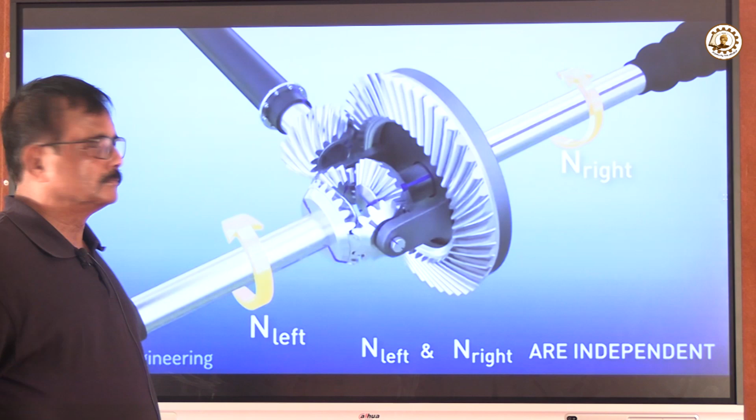Dear friends, now we have another part of our automobile engineering. This is very important, that is the differential. Why is the differential required? This is most important for an automobile, car or vehicle. Differential is most important. How it works and what are the functions of the differential, that

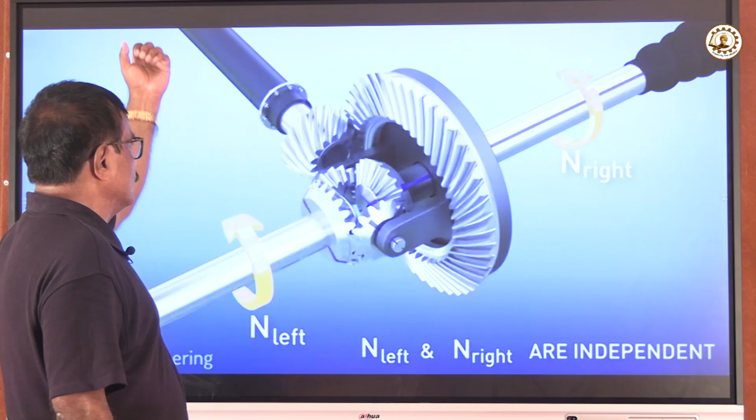we will learn today. Now you see, when a car is running, it has two rear wheels. The differential is mounted in the rear wheel. It can also be mounted in the front wheel if it is a front wheel drive. So in the front wheel drive there is a front differential with the drive shaft, and when it is the rear wheel drive, the differential is in the rear with a propeller shaft. This is the propeller shaft.

We were discussing the rear wheel drive. If it is not a rear wheel drive, then the differential will be in the front wheel of the car. So now we will talk about the differential of rear wheel drive. Now you see, when the car is running in a straight line, the velocity or RPM of the left wheel as well as the right wheel is the same. So no need to make any changes in the wheel rotation.

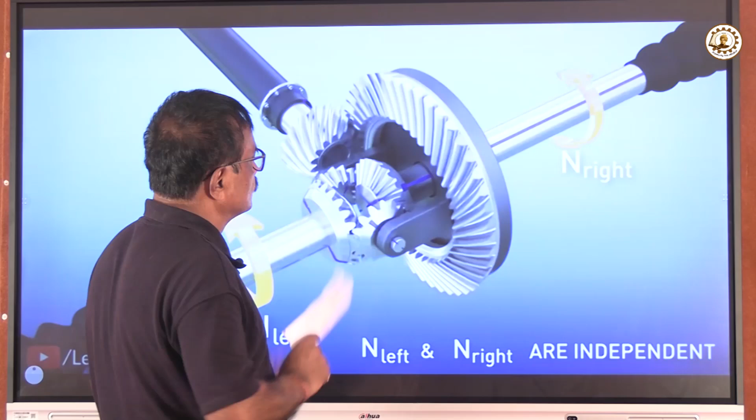But if the vehicle is taking a turn, suppose it is turning to the right, then what will happen? If it is turning to the right, they will form an arc, and the left forms an arc. If it is running in a straight line, there is no difference in the rotation of the left and right wheels. Now, if it is turning right, there is one arc on the right side and another arc on the left side. The right side arc is smaller than the left side arc.

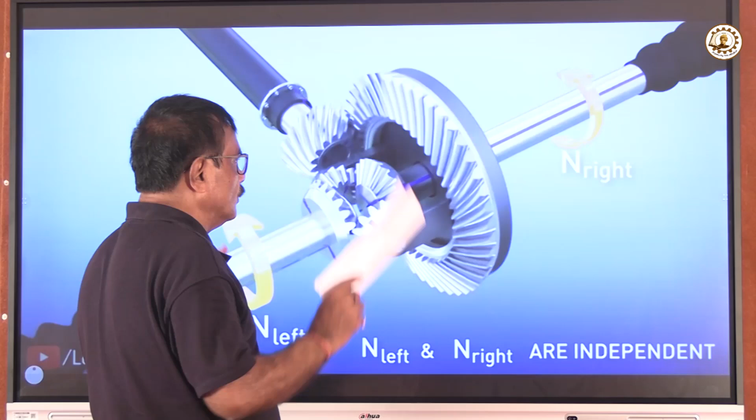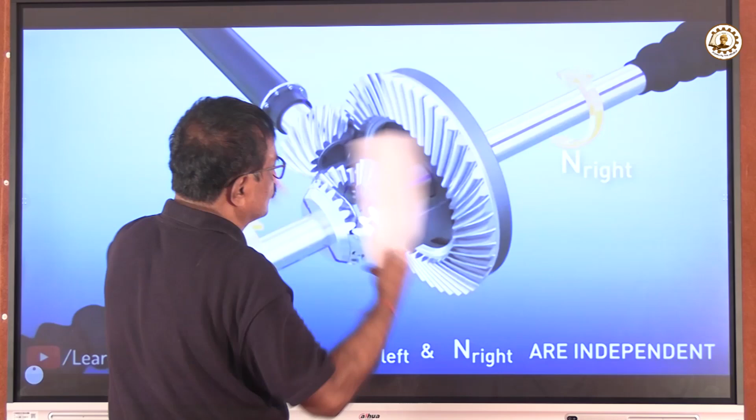So the right will have to move at lesser speed than the left side. Otherwise, it will overturn. So now the question of the differential comes, where it will play its role. What is the role? It will adjust the RPM of the wheels so that it does not overturn. If it is turning right, the RPM of the right wheel will be less and the RPM of the left wheel will be more. That is adjusted by this differential.

What is a differential? This is a differential. This is coming from the engine. After the gearbox, this is the propeller shaft, coming from the engine. This is the pinion and this is the gear. This is one gear. The gear is there and this is a pinion. Now, your engine is turning 2200 to 2300 RPM. But this wheel would directly go 2200 to 2300 RPM.

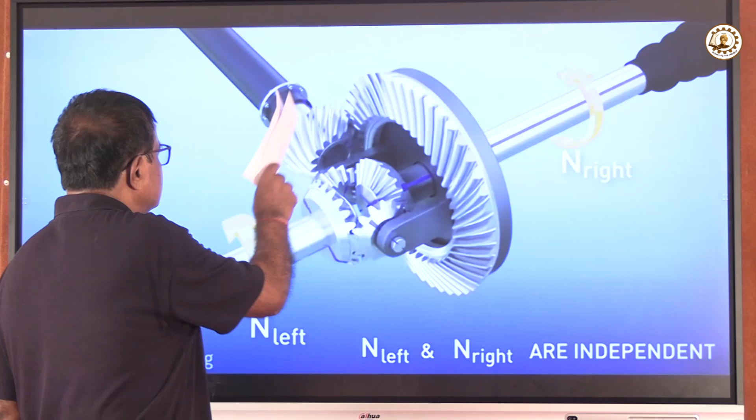So this is a small gear and this is a big gear. This is the small pinion gear. So it will reduce the speed of the engine and, as per the requirement, it will be given to the wheel. So the first work of the differential is to reduce the speed and, as per the requirement, transfer the speed to the wheel. Now second, it's transferring the power to the rear wheel at 90 degrees.

Now you see, this is turning like this, but your wheel is turning like this. So this way it is transferring the power at 90 degrees. So this is the differential. The first work is to reduce the speed. The second work is to transfer the power at 90 degrees.

Now how does it work? This is a gear, this is the main gear. And with this, you see there is another gear. This is called the spider gear. This plays the most important role when it is turning. Otherwise, it doesn't have any role. Now it has two rotations. One is with the big gear. Another, it can spin on its own axis. So this is a spider gear.

There are two spider gears. You see these two spider gears are meshed with the side gears. This is a side gear, this is a side gear. This is a spider gear, this is a spider gear. They are meshed with the side gears. When power is being transmitted and there is no turning, this works as a unit. So there is no difference in the power.

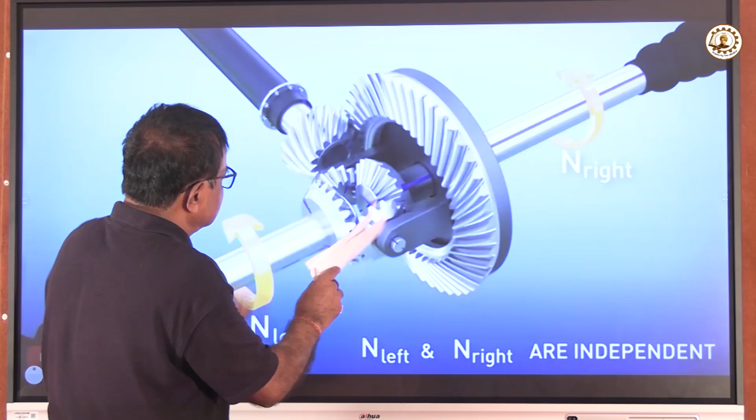Now if it's turning right, then there is a difference, and the spider gear spins on its own axis and adjusts the gear speed, and this way it adjusts the RPM of the tires. This is the work of the differential.